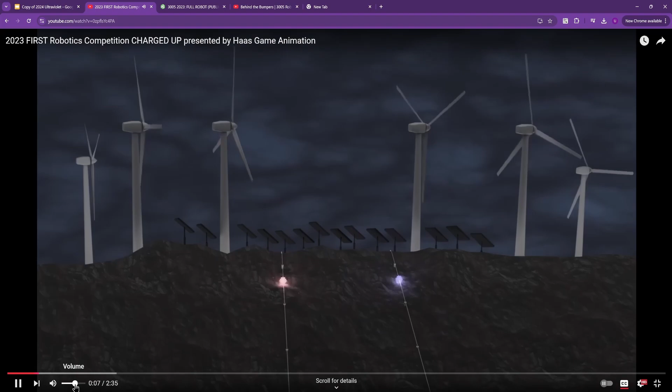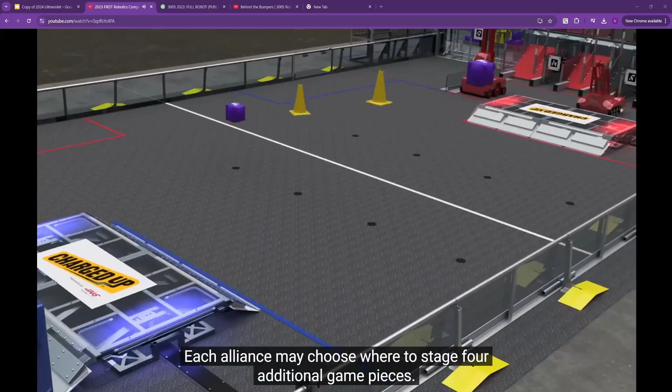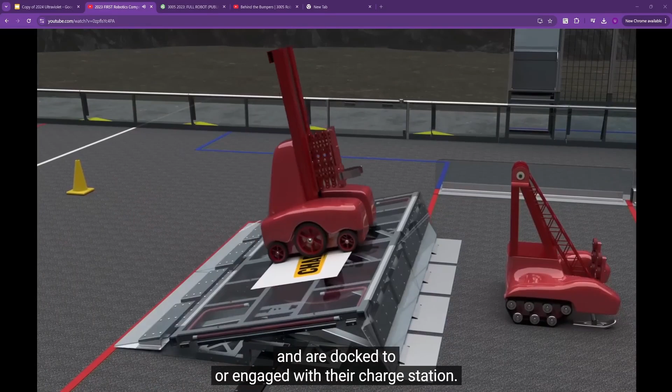Welcome to the 2023 First Robotics Competition game, Charged Up, presented by Haas. Two alliances of 3 teams each compete to score cubes and cones into their grid to charge up their community. The alliances earn additional points if their robots are docked to or engaged with their charge station. Robots start each match in their community and may be preloaded with either 1 cube or 1 cone. Each alliance may choose where to stage 4 additional game pieces. During the first 15 seconds of the match, robots are autonomous. Without guidance from their drivers, robots score preloaded game pieces, collect and score additional game pieces, and are docked to or engaged with their charge station. Charge station points earned during auto count towards a potential activation bonus.

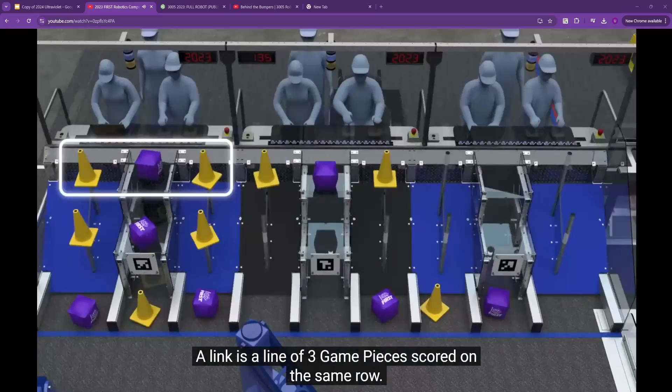The grid has nodes specific to cones and cubes, and some where either a cone or cube can be scored. During the remaining 2 minutes and 15 seconds, drivers control their robots. Robots continue to collect cubes and cones from human players at their substations to deliver power to the grids in their community. Each community contains 3 grids. The center grid is the cooperation grid. A link is a line of 3 game pieces scored on the same row. Completing enough links earns the alliance a sustainability bonus.

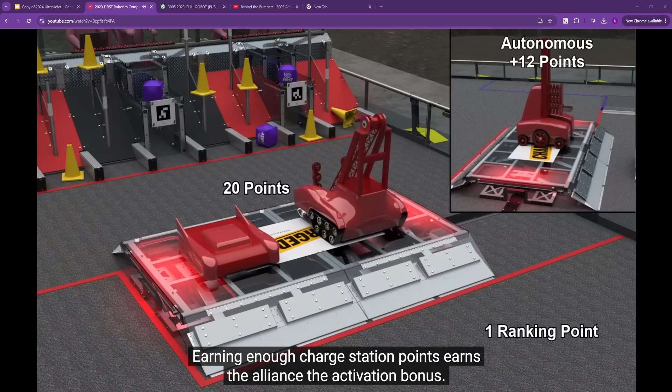If each alliance scores at least 3 game pieces in the cooperation grid, the sustainability bonus threshold is lowered for both alliances. Robots are protected within their community and loading zones. As time runs out, robots race to their charge stations. Alliances earn points for each robot docked to or engaged with the charge station. Earning enough charge station points earns the alliance the activation bonus. The alliance that earns the most points wins the match.

All right. Okay, so looking at our 2023 game, it's definitely very different from Crescendo. This is what we call a pick and place game, as opposed to a launching game.

In these games, your basic objective is to grab an object from one part of the field. In this case, we have our loading zone over here for the Red Alliance, and then we have to take the object over into what they called the community this year, into our protected zone, and then score them in different places along this grid.

In almost every FRC game, we have what are called cycles, where we're basically doing some form of repetitive task as fast as possible. In other sports, you might call it a possession, but since we have multiple game objects, we don't have turnovers in the same way. If you play basketball or watch any of those other sports, they're similar to those things. But it's basically when we're going to go get a new game object, take it down the field, and then score it, and then we're going to repeat that action.

Part of our goal in basically every game that we're doing is how can we perform those actions as fast as possible. That is one of the things that drove 3005, the robot that we're going to look at tonight, to design their robot in the way they did, was how they analyzed the game and the way that they wanted to play it to try to be as fast as they could at scoring those game objects. So what are the kind of tasks that we have to be able to do?

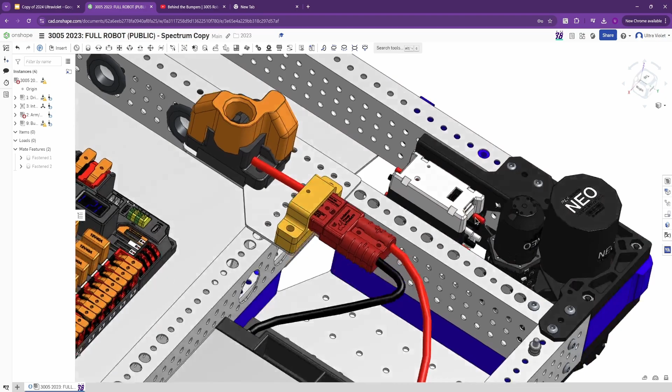Cool. So relatively simple swerve drive base, very similar to what most teams are running. The motors we use are called Krakens. They have integrated motor controllers into them. The Neos and Neo 550s that this team uses do not, so these little boxes here are what control the motors that they're using.

So this is a pretty standard chassis using the Rev swerve modules. They have a much smaller footprint, so they take up a lot less space than some of the other full-size modules, like the Swerve Drive Specialties MK4Is that we use on our past robots, also the West Coast Products Swerve X and Swerve X2 modules that were just released. And ThriftyBot has come out with Thrifty Swerve 2.0 modules as well, that are all in a pretty similar space to the modules we currently use.

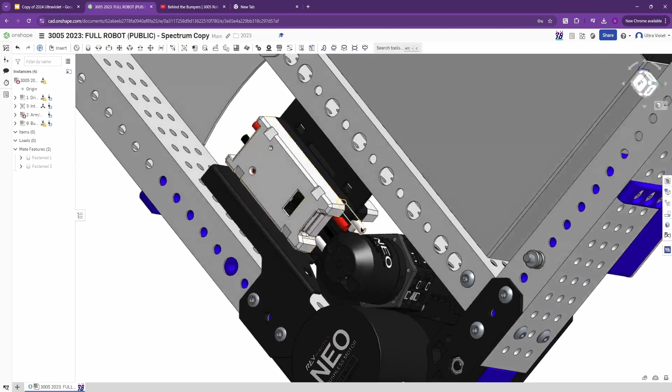So they take up a couple more holes here and are kind of like this full triangle of this corner, where here we're able to package it a lot smaller and then only have the controllers kind of sitting off to the side, where you could move these if you needed to. If you needed the space for something, since these are only attached with wires, you could have them mounted somewhere else, even run the wires all the way out if you had to.

So they do have some advantages, especially on space. They have smaller wheels, so they run a 3-inch wheel, which at different points had some different types of wheels. Some of them were having issues where the rubber would come off. They've fixed that for this season, the wheels for these modules work a lot better. You can still do that, but you have somewhat fewer options of the types of wheels you can run. And then they're only 1 inch wide instead of 1.5 or now even 2 inch wide on some of the bigger modules.

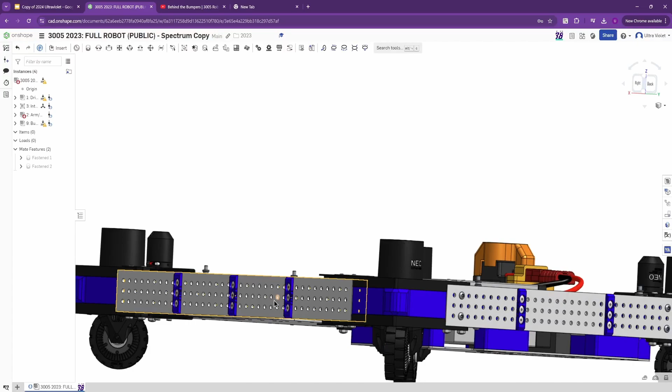But the frames are pretty much standard. They run these 2x1 tubes with this 1/2 inch hole pattern, so every hole on here is a 1/2 inch apart from the next. This really just gives us a lot of mounting options to move things. If we design something early and we end up needing to add some functionality or some part to the robot, having all the holes there already done normally makes that very, very quick to add.

One of the things they have here, they have these little blue parts, and these corners jut out as well. These are what we commonly refer to as legalizers. The way the bumper rules work, your frame has to be a certain distance away from your bumpers. The wooden part we talked about is kind of like the robot pads, and so these allow you to meet those rules explicitly. These are likely just 3D printed parts that they riveted on. Similar here, this is like a 3D printed cover, able to protect some parts of the swerve modules.

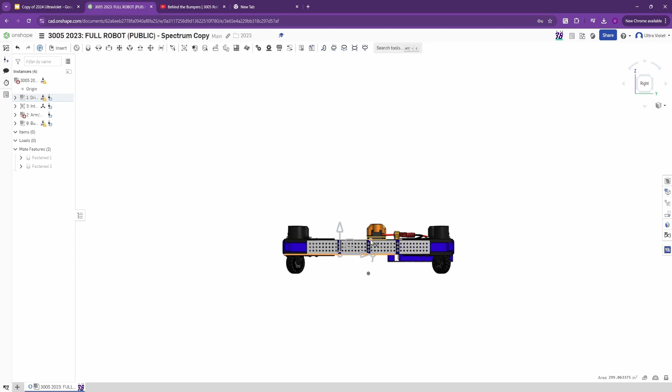And then they have a pretty standard rest of the system. They have a belly pan. They actually dropped a portion of the belly pan, but not all of it. So if we look in from the side, this upper part is just normal, attached right to the 2x1 bottoms, and they actually dropped down the belly pan portion that holds their battery. That's so they could get their battery kind of below the level of this frame, while still giving them enough clearance to drive up the ramp during the end game, or during the game, anytime they needed to drive up and over the ramp.

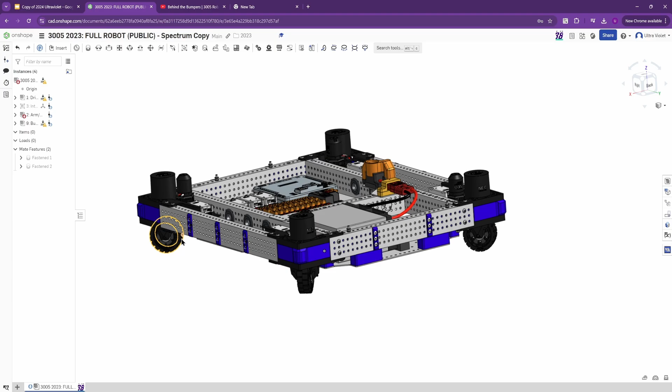We can pull bumpers back on. Maybe we can pull bumpers back on. What do we need to do? I did hide all instances, and now everything's hidden. There we go, bumpers are back. Okay, so we can see how the bumpers work here. I don't know if we have all of their mounts on here. Oh, that's the whole rest of the arm. Okay, it just showed everything. That's fine, here we go.

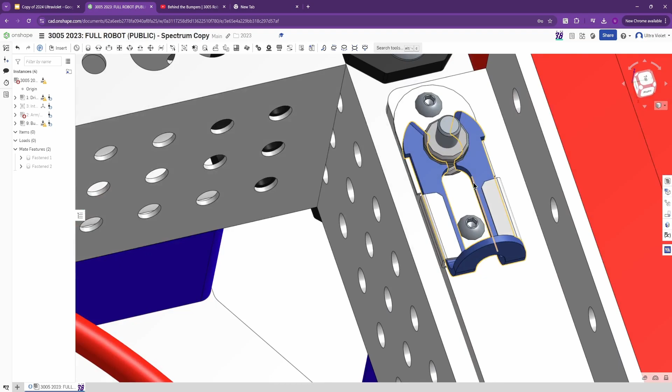Okay, so it also has their bumper latches. This is a relatively common bumper mounting solution. We've used this before in the past, I think back in '16, maybe we started this, '17 - almost certainly '17. Our '17 robot and I believe '18 both use similar latches. Sometimes they work well, depending on how we want to do it. But these basically just allow you to slide this back on each one of these 4 latches that go over these pegs mounted into the robot, and they just kind of snap into place, and they hold your bumpers on.

So depending on exactly how much space or size you have to fit everything, and again bumpers - we know the whole rule set is getting overhauled quite a bit going into next year.

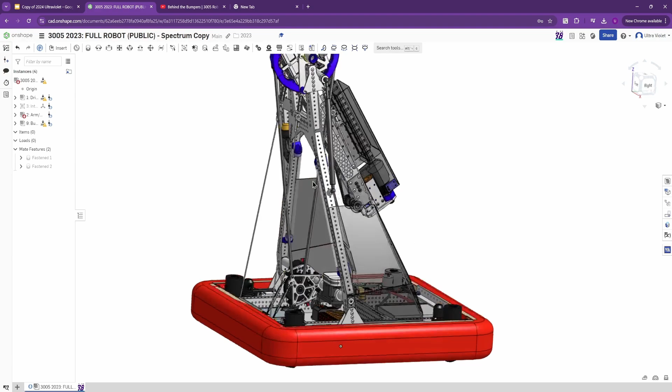This is a really integrated robot where there's not too many mechanisms going on. You basically have your drivetrain, then coming up you're going to have the rotation part of the arm, the extension part of the arm which we'll look at, and then the intake which has a couple interesting features on it as well. So looking at the arm, this robot doesn't have a ton of structure at the top - they did a lot of work to keep it very light. They didn't have any large A-framing or anything, they basically have these two main arm supports coming up here at an angle.

And then what they use is kind of like a suspension bridge - they're using tension members, so they have these that they're able to tighten on each side. I don't remember if they were using steel cable or cord here, but either works. These ones are probably steel cable, it looks like - that would be my guess. You can use relatively thin steel braided cable, it has very fine strands in it that allows it to be somewhat flexible and allows it to be very strong under tension.

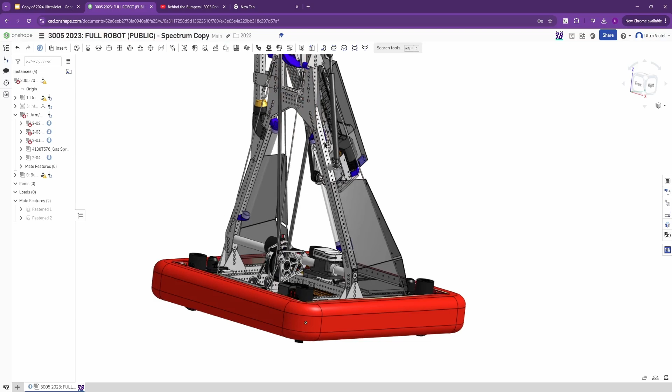So basically you're stretching this cable out, and if you do it on all four corners and stretch it out, they act against the forces the same way that having a bunch of actual support arms would. So if you actually wanted to come in and have a full A-frame tube, if you wanted to put more metal here like aluminum rods or aluminum tube going to the front or back, you could do a very similar thing, but it would just weigh more.

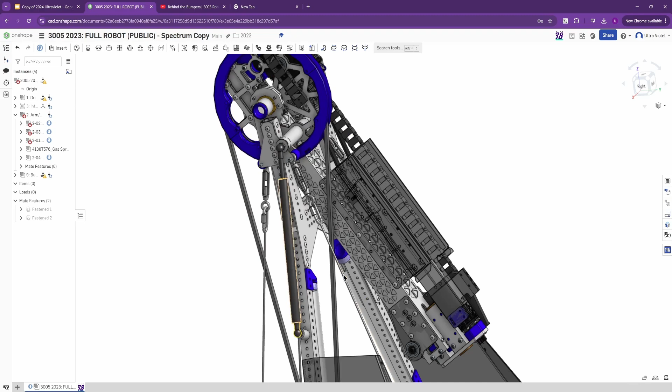With these tension setups, you can adjust how tight they are by turning these turnbuckles - similar to what we use to tension our chain, just a little bigger and designed specifically to run with cable. If you have all four of them done, and some force was trying to push back on this arm and wanted it to move backwards, you would be pulling these. Since they're already tensioned and tight, they're not going to expand easily, they're not going to stretch - they're not like rubber or anything. So since they can't stretch, you can't have this thing get pushed back. The same thing happens if you have some force here pushing forward - you can't stretch these ones as well. And the same works for left and right.

So for a relatively limited and very lightweight structure, you can still have an incredibly strong overall mechanism because you have these cable runs in place supporting the entire structure. They have some specific places where they do these standoffs and bolts on top of them, so they have those all designed into the mechanism - they know which side of everything goes where, how it's not going to have too much angle, or how big the washers need to be to support it so it's not moving around too much.

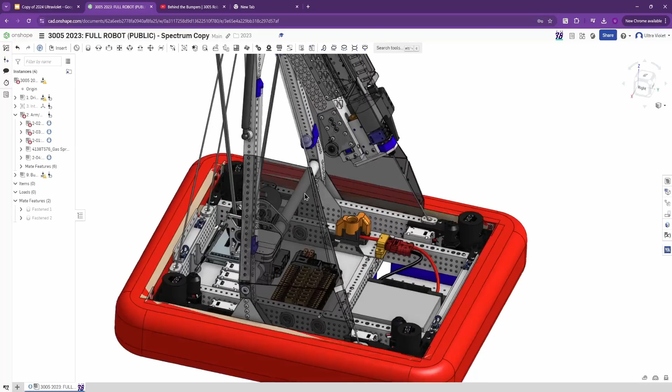So they did a very good job designing this in and making it work for them, even being able to use the cable to mount things like some protection here, sponsor panels most likely, without needing to have the full rail or anything there for it. So this is a very, very light system. If you have something that's going to be very tall, or just need it to be very thin and out of the way, this works really well for that.

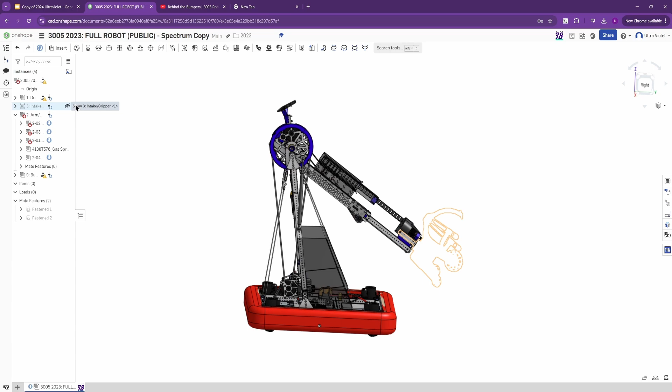Okay, so the main actual arm joint that does the rotation - what this robot's going to do is pick up its arm and rotate it forward and backwards. So it can start over here, put its intake out, grab a game piece from the floor, and then it's able to flip its arm all the way over and score from this backside position, or the extended backside position to reach even further.

I was looking for the button. I don't know where the button is. Okay, it's fine. Let's try to get it back in a reasonable position.

So this arm pivot joint is powered down here on the gearbox. They have two Neo motors on this gearbox, with just a single gear reduction, so the two gears come right off the motor. When we have the gear right on the end of the motor, or sometimes a pulley, we always call this the pinion, the one directly on the motor.

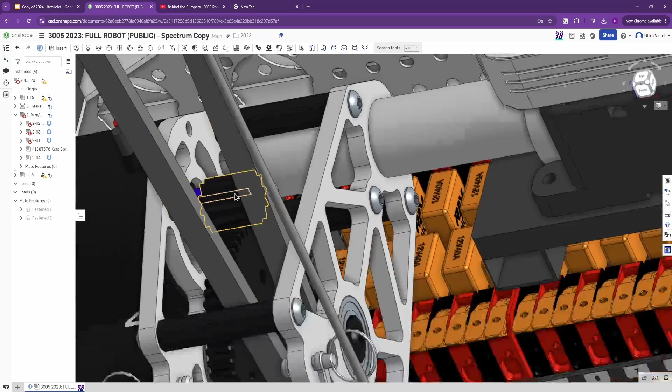This is often a small gear because, like we talked about last week, one of the main principles for doing pretty much any motion in robotics is that the motors are often spinning way too fast to be usable. So we want our actual output to be geared down. We have a small gear, pulley, or sprocket here, and then a larger one here, so that for every one rotation of this gear, it only spins a quarter of the time, or whatever the actual ratio is.

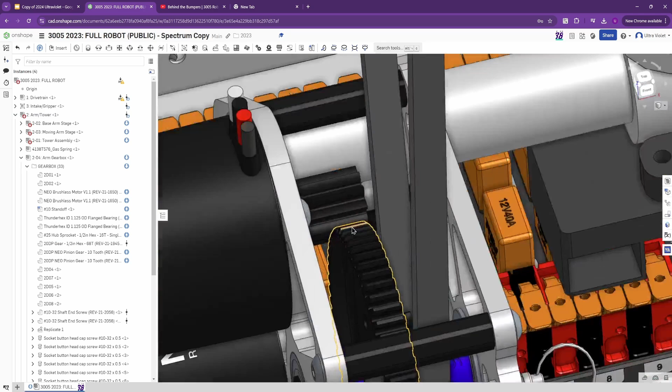In this case, we could go in and figure it out. We know this is a 10-tooth pinion, and this is a 68-tooth gear. The math is really easy, it's just division: 68 over 10. So for every 6.8 times the motor spins, this gear only spins once. That also means the torque output, the rotational force we have, is multiplied by 6.8 at this shaft. And so then they're able to gear it more.

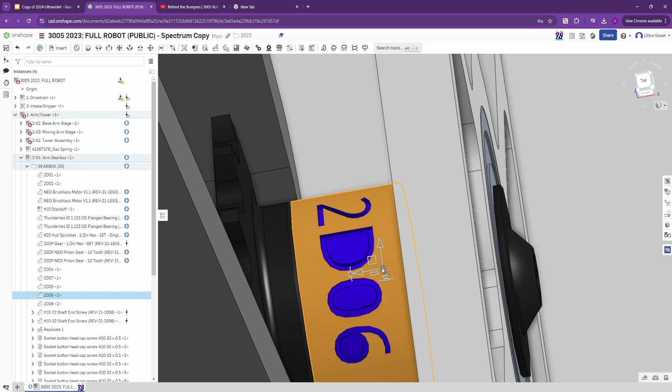So down here we have a sprocket, and the other spacers here also have the part number printed into the spacer so they know which one it is, which is nice. So instead, if you have two things that are very close together, they have it just embossed directly on the print.

You should have the same thing on this one, I imagine. Yeah, just down on the other side. So they have the part numbers directly printed into the spacers, which is a very nice quality of life feature. If you quickly have to reassemble something in the pit before a match, you know which spacer goes where, and you never have to figure out exactly which size it is or pull out calipers to measure them. You can have it printed directly into it.

Okay, so the other part of this gearbox - we'll come back to how this works down here. The sprocket here is a small sprocket. The gray blocks up here are chain, and they come up into this much larger sprocket they have at the top. So this is a very, very big reduction.

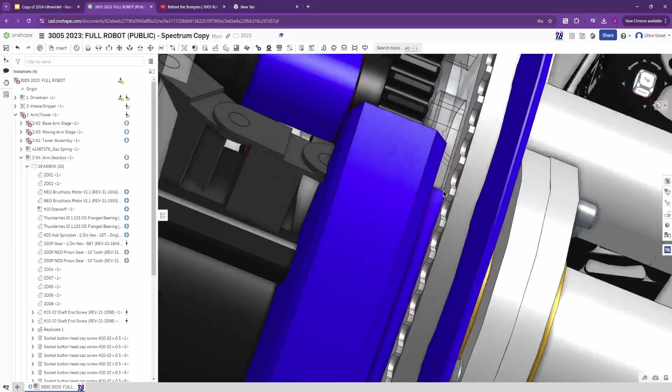So we can kind of see a little bit what it is. It's one of their custom parts, so it's just numbered by their numbering system. I don't know exactly how big this is, but you can imagine this is a much larger reduction because it's basically just the ratio of diameter from that large one to this small one, because they never actually need this arm to spin a full revolution - it can only ever go from here back to behind itself. So they want all the torque they can get to make it much more controllable.

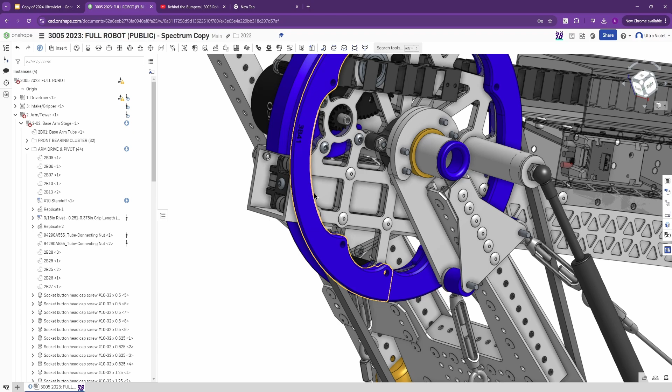And that's a big part of one of the important things we're trying to do while designing robots: mechanically, you want to build the robot in a way that the software and electrical team can actually control it comfortably and put it into positions easily. If this sprocket was a lot smaller, if you had less motor power or less gearing, it's possible the arm could still move back and forth, it might still be capable of doing it, but it would happen in a way that would be much harder for the software team to control.

A lot of times when we're doing the math to decide exactly how we want a ratio to be, part of that is thinking: how fast do we need this arm to be able to spin from the floor back to behind us, and doing it in a way that's efficient for energy, so we're not using too much battery, and is controllable in software, so that when we tell it to do something, it actually goes there, stops, and works perfectly.

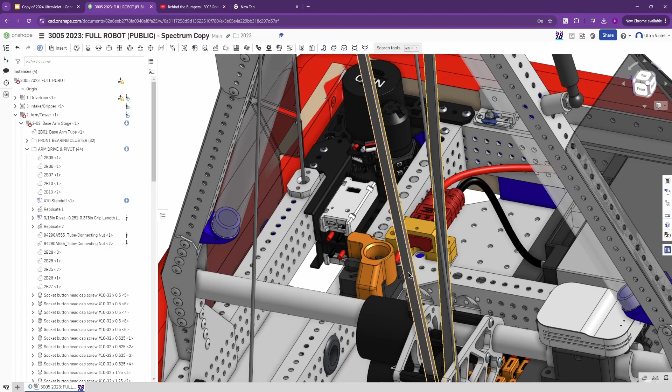Because they have this really long run of chain, even though it is steel, it stretches, so you need to have some form of tensioner on it, or as soon as you build it and start running it, it'll stretch enough that it's possible for it to jump off the sprocket, and we don't want that.

The way they tension this gearbox is because the gearbox is actually only mounted on this single pivot tube, and then it's tied back to the rear frame rail with these two turnbuckles. These two devices are the same type of device. One of these threads is left-handed, one is right-handed, so when you turn this, it either tightens both of them or loosens both of them. That way you can pull this gearbox down, it'll pivot around this pole and get lower, adding more tension to the chain.

So if during competition you start seeing that this chain is loose, all you have to do is turn these two turnbuckles, and now you can get a much tighter chain.

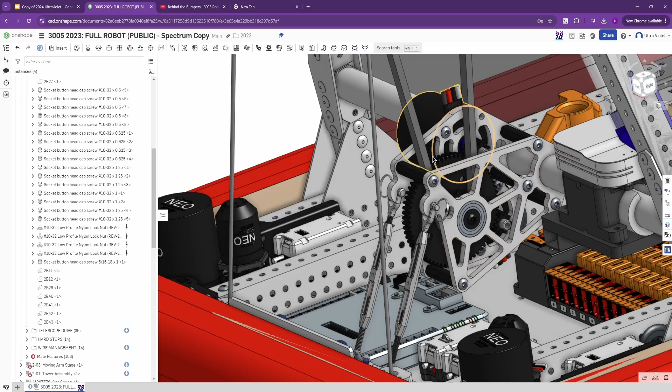This ends up packaging very well. The gearbox ends up almost just floating - you don't have to have a bunch of other sturdy mounts for it, since you have this part in tension and you're using the chain tension itself to hold it. It's not like this is going to flop around at all, and you're able to have a rather strong tube here connecting across the whole assembly.

The way they mount this is with this little part here, which is called a tube insert nut.

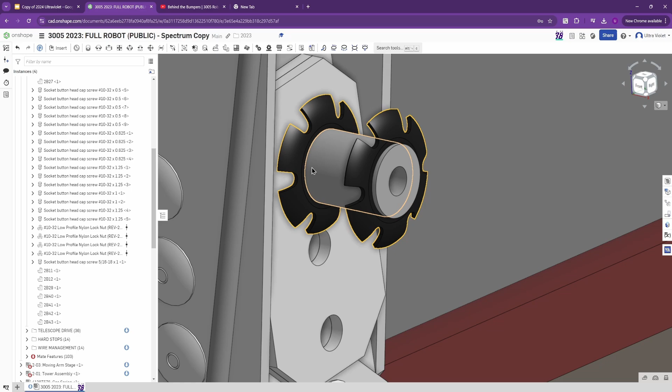These are used in a variety of situations. Some of the larger ones end up being used on parts of bicycles to hold the handlebar and things, part of the stacks of different bikes. Sometimes they'll get used for table legs and things. But basically, they have these steel little flanges, the black part here, that are able to be pressed and compressed into a tube as you shove it in one way. Then if you try to pull it back out, these little corners try to dig into the tube and stop you from pulling it back out easily.

This bolt here is what's bolted into that tube insert nut. You can also put those into the ends of some square tubes. They make different ones, but they're more commonly used for round tube, and we've used those a good amount in the past, and they do work pretty well.

In addition, they actually mount their radio to the same tube, the radio and radio power module here, so they have a little 3D printed adapter that lets them just clamp this on, and then I imagine this is some amount of foam to kind of shock absorb it, so they're not getting as much vibration through their radio either, because you don't want the radio to restart in the middle of the match because you shook it too hard.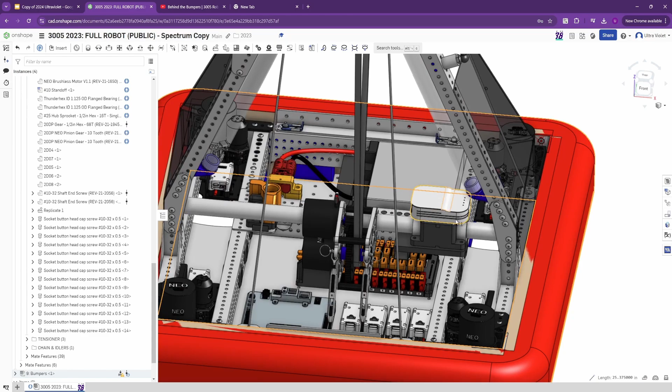This is up out of the way - it's not too close to any motors. You have the motors here, but they're not that close to it. You can easily see the lights, easily grab it to program it at the event, anything like that. And we'll be running the new radios next year, so they won't look exactly like this, but they're a similar rectangle brick, just black now.

Okay, so going back up, we can start looking at how they did the pivot as well. So this is a pretty nice way to do it.

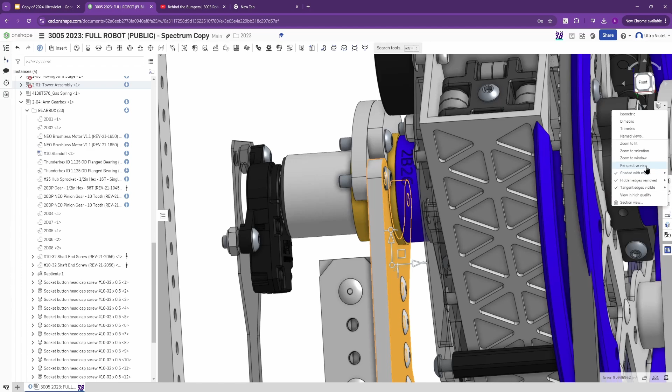So they have these plates that are riveted into the 2x1, and they are capturing this bushing. What's cool about it is instead of just putting a hole in a single plate, let me grab a section view here. Yeah, perfect. Okay, so instead of putting a hole in a single plate, both of these could have been just one single plate and they could have shoved the bushing through, and that would have been really strong. It would have worked great.

You would have had no issues until you wanted to change the arm. If you wanted to change the arm, you'd basically have to somehow either take the whole thing apart or hammer this tube through the entirety of the arm assembly to be able to get it all apart. And that's really frustrating. You don't have enough time.

If you're in the middle of playoff matches and you're trying to get the robot back up because something broke, you want to be able to do this really fast. And so these bolts right here give you the ability to do that, because if you just unbolt these lower two bolts, this whole upper cap comes off, and now the whole arm, bushing, and everything can be taken right out the top of the robot once you remove the chain.

You'd probably have to unbolt a couple other pieces that are mounted on. You have to deal with the wiring and things, but it still allows for a lot more maintenance than it would if you had to somehow shove this tube through and then reinsert it.

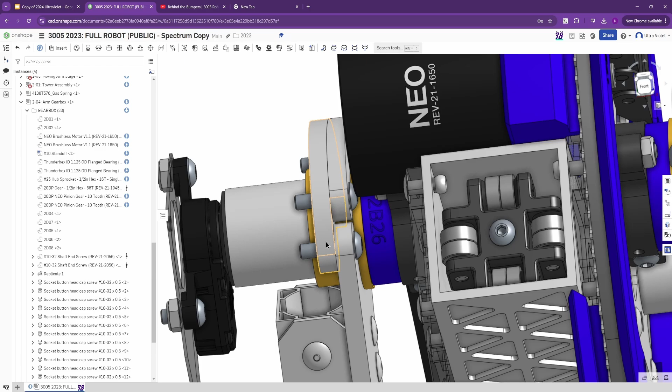Without a noticeable loss of strength that actually matters. You're still not going to be ripping through these bolts at all through any of the weight, especially since most of the weight of the arm is still going down, right? Gravity's always acting on it that way. We're not too worried about the top unless it's coming out for some very, very bad reason.

If it's getting yanked on, this robot's not having to climb from this. We're not suspending the entire robot from this. Even if you were, this would still probably be enough. You might want to add another set of bolts or something, but you'd probably be able to get away with just this.

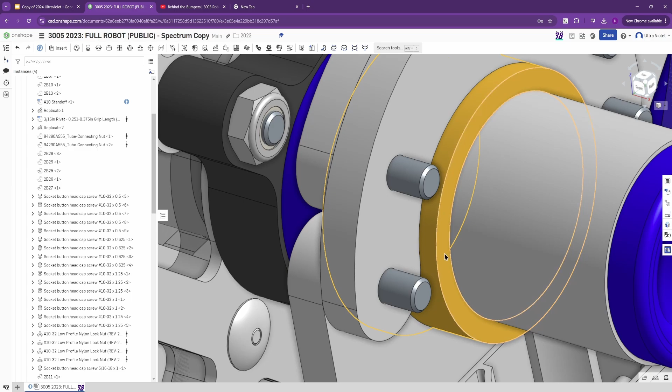Okay, so this is that pivot shaft that's being captured there. We briefly talked about bushings last time, but just a reminder, these are also known as plain bearings. They're made of like a brass, and they normally have some sort of oil embedded inside of them, so as it rotates, it gets lubricated so it can slip. Largely, these are just much more inexpensive than ball bearings, and they're also way more space efficient.

A ball bearing for this same size tube to be able to spin inside of would be much, much larger than this bushing here, would be much heavier, and just isn't needed in an application where we have enough torque to overcome any of this friction, so it's able to move smoothly anyway, and we're just not spinning very fast, where we're not going to be generating a ton of heat in this motion either, or at least continuously not very fast.

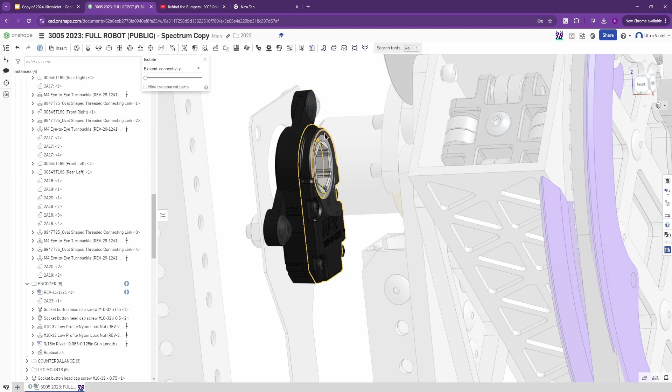Okay. The other part of this pivot that might be interesting is this little bracket sticking out over here. What that is their absolute encoder mount. This is a REV through bore encoder. This little device lets us, or lets any team, very quickly know where a shaft is that's positioned inside of here and where it's rotated.

And it can do it in absolute units, which means when it powers on, it knows which way it's pointing. So even if you start the arm completely vertical or completely down or in any position, the robot can know where the arm is at boot, at startup, and then from there be able to send it to wherever you're actually telling it to go. So this is a very convenient way to do that.

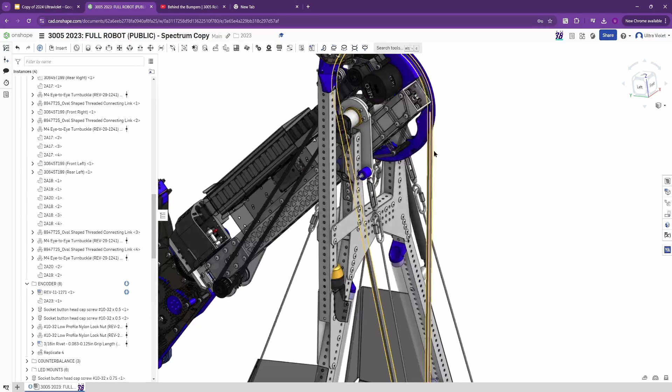We did something similar on our pivot this year, so we could start it up in any position and the robot would know where it was. And you also just get more accurate feedback control for the programmers because they can know the exact angle of the arm without having to go through any of the gear reductions and things that the motor is.

So if you're using the internal encoder of the motor, you would be spinning dozens of rotations for every time this needed to move a little bit, where here we know we're spinning only that portion of the rotation that we're worried about and actually directly controlling.

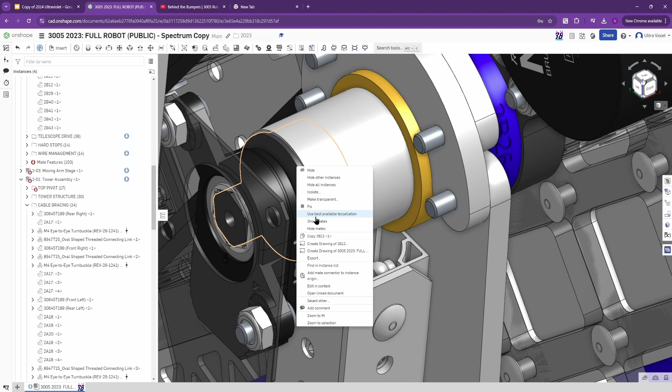So they have a little tiny bit of hex shaft mounted here, using one of the hex tube adapters that they pressed in, and then a little hex shaft. That actually might just be a full part they made. Yeah, this is actually a full printed part, and they just printed the hex shaft on there.

So instead of having a piece of hex shaft, they just printed this entire thing, and they embossed the part number again. So any of their prints, they can do that. They always leave it there so they know what part number a print is. Then this just goes inside the encoder, so you don't need the aluminum shaft there. It's not taking any real load, all of that's being transferred through this. You wouldn't want it on the encoder, so this is a bit lighter to just have it as a printed part, and that works great.

Similarly, they have some more parts that look like lightly, probably printed parts, almost certainly. They have these chain guards on the outside so the chain can't skip off at all, and those get bolted to the big custom sprocket that they made. So this spacing and everything is there so they can have their different mounting points on it, and anything else they need.

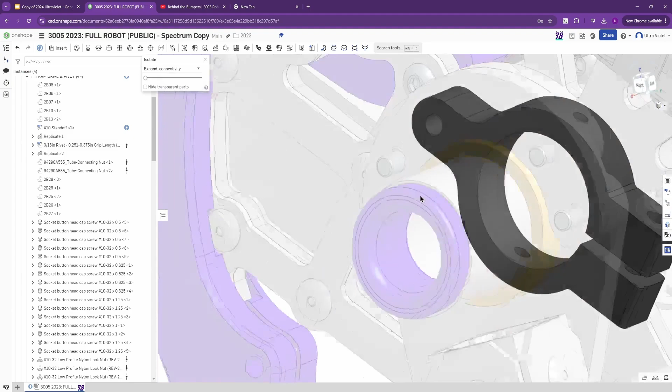Should be able... I'm trying to figure out. Yeah, so this is part of how they're able to mount to the actual arm. So this printed part here mounts to the sprocket, and then this clamps along this tube.

I'm not sure if they get it any other place. So it looks like you have the sprocket part here. The opposite side from where the sprocket part is, is just a piece of polycarb. We can see it's translucent in CAD, so we know this is not going to be metal. This is probably smoked polycarb, which is like a translucent gray color, and it looks like it just goes through that at the 1.125.

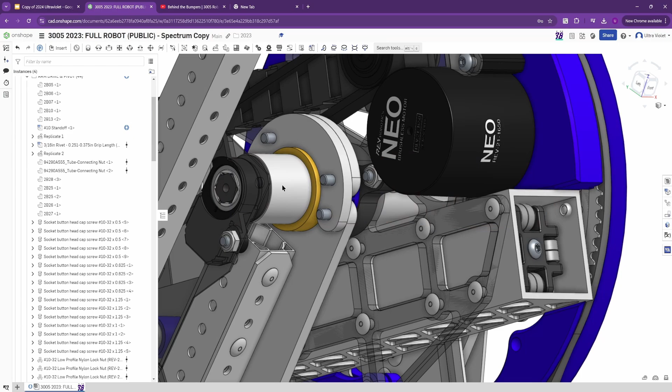That's probably similar, yeah, so that's still going to be a relatively nice fit there. And then they just clamp on again. I don't know if there's anything else transferring any torque there - it doesn't look like it. But it would be relatively hard for that to slip, but not impossible, but probably not.

I don't know if they may have at one point pinned the tube through here so you could drill through one of these holes and put a bolt through there if you needed to. That may have been an option they were considering but didn't need to do. The clamping was enough when they bolted down this bolt here - that gap gets smaller and clamps to the tube, allowing it to rotate cleanly with the whole arm assembly.

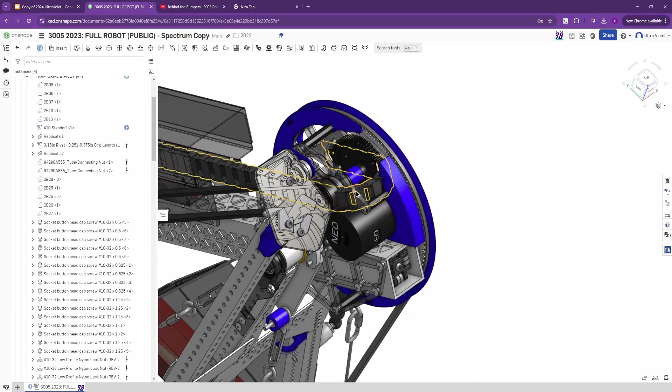Okay, so let's look at how they do the extension. Kind of built into this sprocket, we can see we start seeing the different bits of bearings and some bolt holes and things, because they actually use it as the gearbox mount for the extension. Let me see if I can make this a little easier to see - I'm going to hide the cable chain. Okay.

So we have, again, a relatively simple single-stage gearbox. We have the pinion on the output of the motor, and we have the larger gear here, so we get that nice gear reduction again. We can look through - so this is a 64. I'm guessing this is a 10 again. No, this is a 13, so it's a little bit different gearing there.

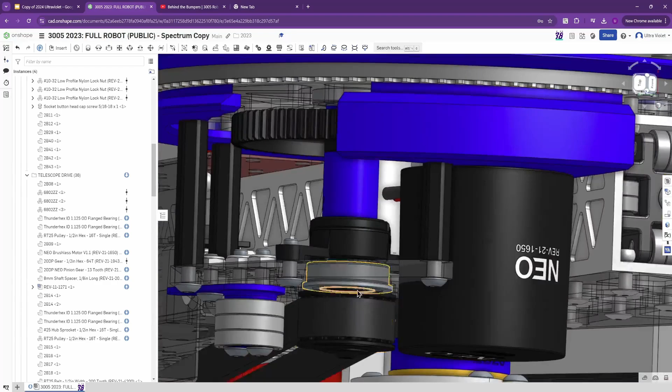So not entirely sure why they decided to go that route instead of getting something even smaller. There may be a packaging issue, some reason why they needed it to be a little bit further away - possibly because of this belt, actually. This is probably why - my guess is if you mounted a 10-tooth there with this same gear, the motor would have scooted in just enough to hit here, and you wouldn't want that. That's only from looking at the CAD, no real idea if that's the exact reason why, but that's probably why.

But you still get enough reduction there for this linear mechanism, because you have this pulley that's on the output here, and it's driving this really long belt. And it's driving this belt down to a sprocket, and so the sprocket itself is what's doing our linear motion.

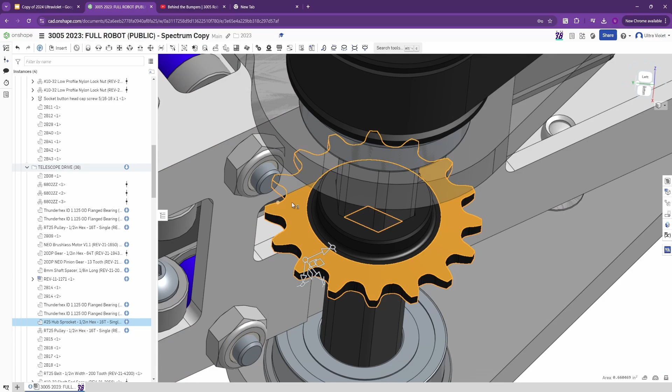I'm going to hide some things again - let me hide the drivetrain and the bumpers. Do that quickly.

Bumpers. Okay, so we can see under it.

So you have another sprocket, and they've turned this bit of chain here that's mounted to this tube into a rack. This is basically like a linear gear, so instead of the chain wrapping around the sprocket, it's just moving along the individual teeth of the chain mounted here. It's doing that to extend and retract this whole assembly in here, fully extending it and bringing it back just by spinning this sprocket in the chain teeth down here.

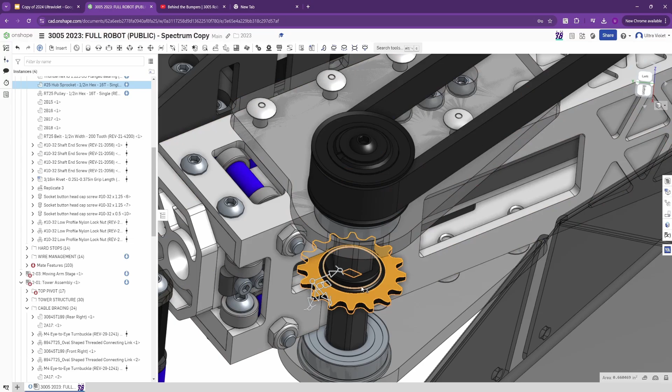So every one rotation of this sprocket moves it basically the circumference of the sprocket, roughly. It's only a few inches for every rotation, and it needs to move a pretty good amount. I don't know the exact amount of extension this has, but it's a decent amount here, 20-something inches, probably. Let's see, 20.5.

So with that, you have enough control from the motor and gearing to need 4 or 5 revolutions total of that sprocket to extend it the whole way. That should be controllable enough, and was, since this was a competitive robot.

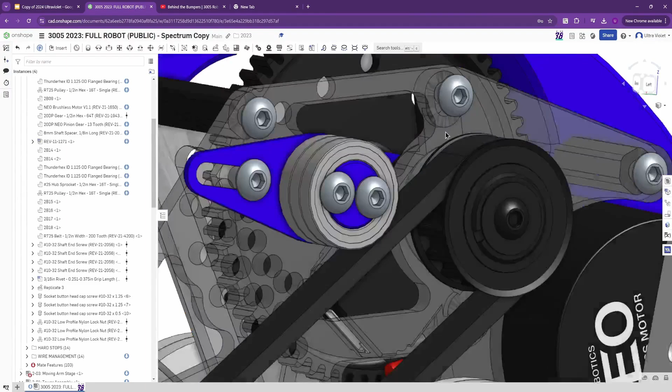Okay, a couple other little things they did. Because they have this really long belt run - most of the time with belts, we don't have to worry about them in tension too much for our small belt runs like intakes and things. The belts we use have fibers running through them that don't stretch easily, so the belts don't grow the same way the chain does. You'd think the steel would be harder to stretch, but because of the way they're assembled and the way the whole assembly works, the chain actually creeps and stretches a little bit more than the belts will, since they have these fiber cords running through them that prevent that stretching.

But when you have a really long run, it's much harder to account for that, as even little things like if this plate started bending a little bit, or you just didn't get everything exactly right with the rivets and holes and stack up and things, you can have a little bit of gap in things over a long distance.

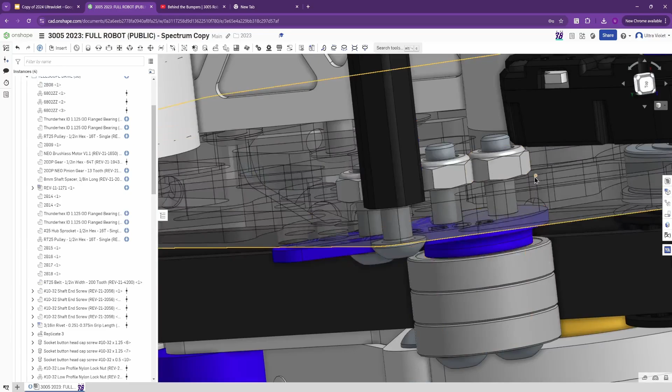So they did build in a chain tensioner here that allows them to loosen up a few bolts, slide this tensioner in, and then tighten these back up, because they have a single slot in the part here, and then a longer slot, if I can find it.

Are those also holes? Oh yeah, okay, so those are also holes. This is what you get for doing this live. Again, I haven't actually looked through this robot most of the time, so a lot of times I have to figure it out along with everybody else. There they go, the slot is down here at that curve - I just couldn't see it earlier.

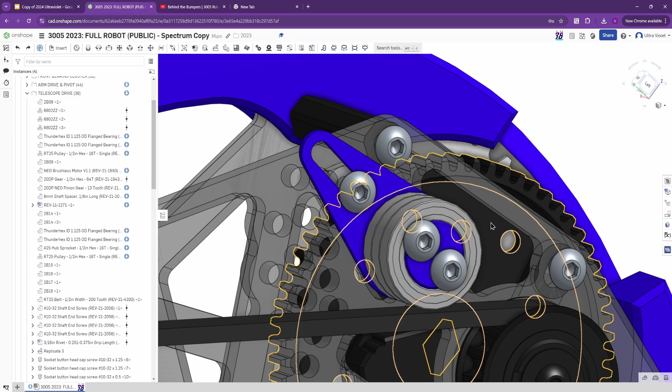So you have this slot right here, and what they're able to do with that is move this bolt into any of these other holes to adjust the tension on this setup. This is one of the looser ones - they could take this out, loosen these two, rotate this down, and start pushing it in further, pushing the belt down to add more tension. So if anything starts to creep throughout the season, they have a bunch of different settings built in for where to put tension.

These are all on this arc that you can kind of see forming here, so this gives them a lot of different options. They would know what the next hole over was to adjust something and add a little bit of tension from this pattern they built in.

So a lot of those are things we're talking about again - it's relatively easy to make a robot that does a task. It's very, very complicated to make a robot that does the task extremely well and also works throughout an entire season, can be repaired, can be upgraded. All of those things go into our engineering design process to make a more competitive robot.

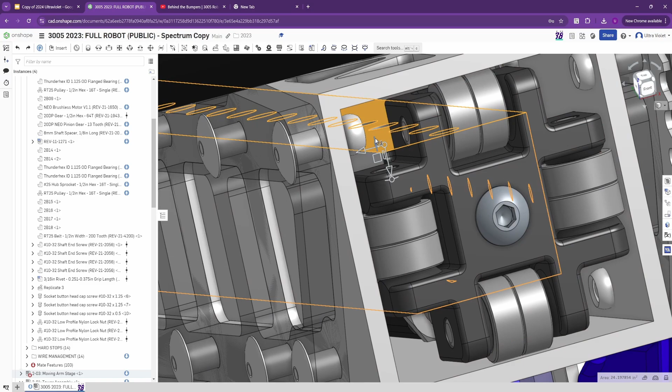Okay, so we're going to quickly go through how the extension works, because it's kind of the same bearing package that we've seen in elevators and things. They just have roller bearings on the bottom stage of this tube that are sliding on all of the inside walls, and again, the bearings reduce friction, making it slide super easily.

And then at the top, out on this side, so extend this out, we can see that they have bearings on the sides here on each side of the tube. They again have bearings, and they're able to gap them so the chain can come through nicely.

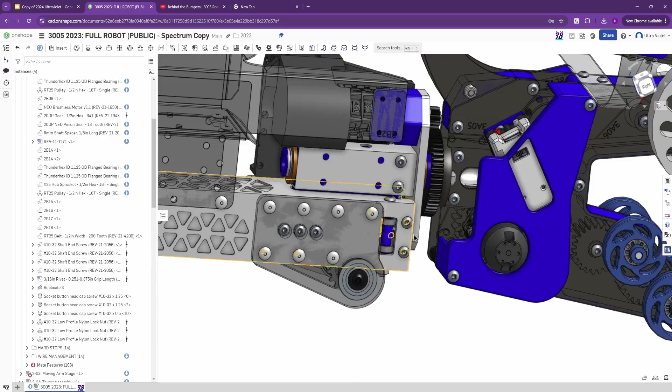Similarly, they have some other parts that have to come through up at the top, and so they use that same kind of gap method. You have a slot here in the external tube for it, so it's able to slot in. So when they're going down to actually intake, this whole arm is very supported. It's brought back in fully, and it is not going to bend or break when it's out as an intake in the middle of the field. But once they extend it when they need to score, it's a little bit weaker there, but you shouldn't be running into things at that point.

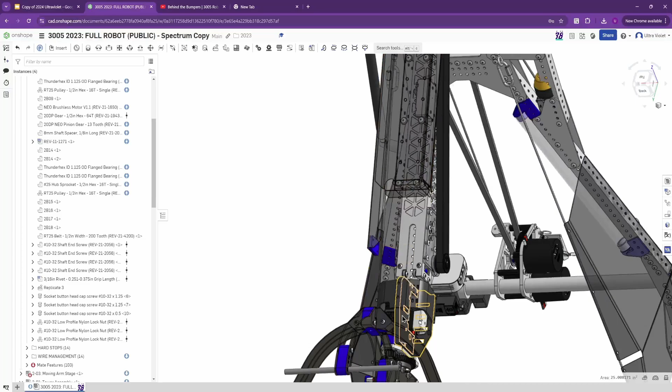All right, let's look at a couple things. So the last bit of the extension that we hadn't talked about is how they do the cable management for the extension. They have a cable chain that's mounted to the arm, a plastic cable, and then it's able to get folded back up inside this tube. So as it comes back, it gets folded up and held in here, so it's not swinging around. And that's where the wires are, able to extend out to the motors that they keep out on the end of the arm.

All right, with the last little bit of time we have, we're going to talk about their intake specifically. So their intake was one of the cooler ones this season, because what they figured out they could do is when they came out and extended the arm and put it down at the floor, they were able to use these two wheels to intake both cones and cubes depending on which side was facing down.

And in this configuration right now, this is their cone pickup configuration. So they would pick up tipped over cones. The cone would be on its side, and they would basically almost pick it up like a log. They wouldn't worry about which side the flange was on, because they have this pivot joint here, or a rotating wrist, that allows them to spin this whole contraption upside down.

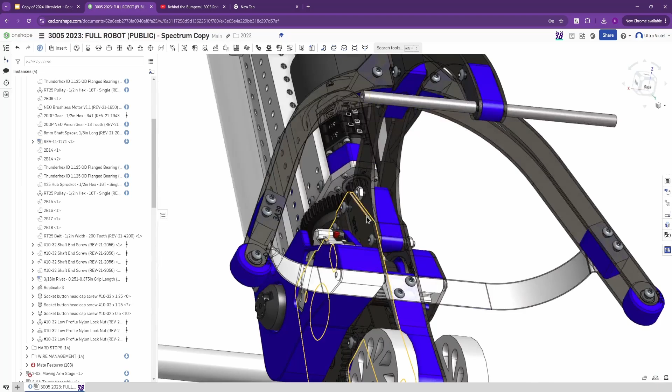I don't know if it does it in CAD. It doesn't look like it does. It would be free spinning right now, or at least it doesn't do it in this configuration in CAD. But this allows them to spin this over 180 degrees.

So that they can pick up the cone, and if the flange is over on this side, they can flip it 90 degrees and have it be able to score and put the cone facing the bottom, or if the flange is over on this side, they can turn the other way and do the same thing. So no matter which way the cone is, they're always able to place it on the little stick that you have to score it on, because they were able to rotate their wrist.

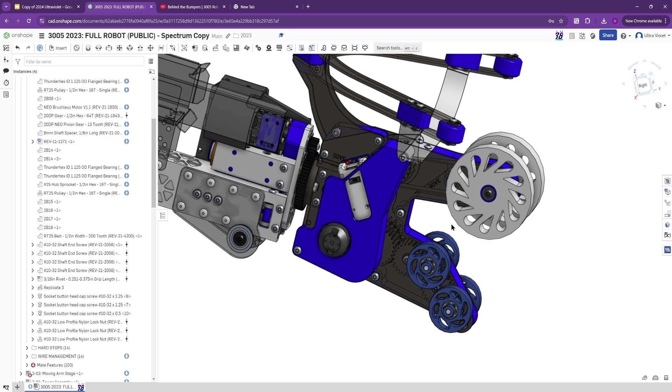And that was one of the more challenging design choices that a lot of teams had to decide, was whether we wanted to be able to manipulate a cone in that way, because it wasn't a symmetric game object. It's not like a ball where you can just score it in any configuration because it's all the same. The cone itself clearly had a very one-sided way it had to be scored, a single orientation that worked. And their robot did that very, very well, able to pick up a cone smoothly from the ground and then place it back depending on which way they flipped the wrist around.

And then when they flipped this all the way over and put this part towards the ground, the cubes were able to be intaked into here, basically acting as a ball. They were cubes, but they were inflatable. So once you did that, they pretty much worked the same as any foam ball or anything, and it had a very lightweight outer frame here.

These wheels have cutouts in them. They're called compliant wheels, because you can push or squeeze them and these little cutouts fold and bend, so they mold to the shape of the game object.

So that's what we're looking at, being able to intake the cone through here, sort of just grabbing a cone the same way you'd grab it with your hand. They're just doing it with rollers here, and similarly doing the same thing with a cube.

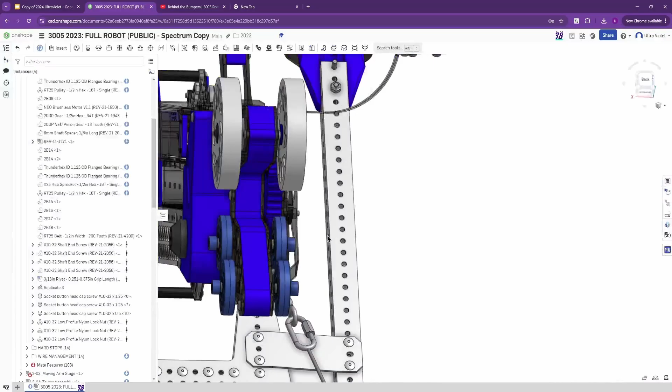The motor packaging to be able to do this rotating wrist and also drive the intake is pretty cool. It uses a good amount of 3D printed parts out on the end here, but we can start looking at the one in here first. Let me hide this mount.

So this is relatively simple. This is a Neo 550, a really small brushless motor that Rev sells, into an ultra planetary. This is a tiny gearbox that's often used in FTC robots, but it mates well to the Neo 550. And then they have a small printed adapter here to mount the shaft off a little bit.

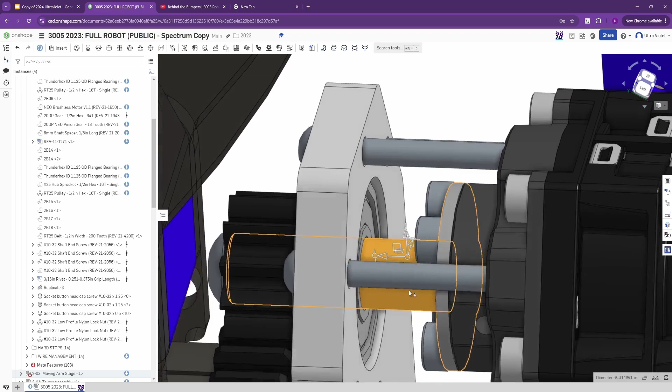So this is an adapter that's sold that lets you go from the ultraplanetary to an 8mm round shaft, which is the same shaft size that the full-size Neos use and some other motors use. They're able to put the pinion gear right here at the end, and that spacer block lets them hold this housing in here without having it rub anywhere and without the shaft getting too long to run into things. They had some extra space here at the back end, so it was easy enough to do that.

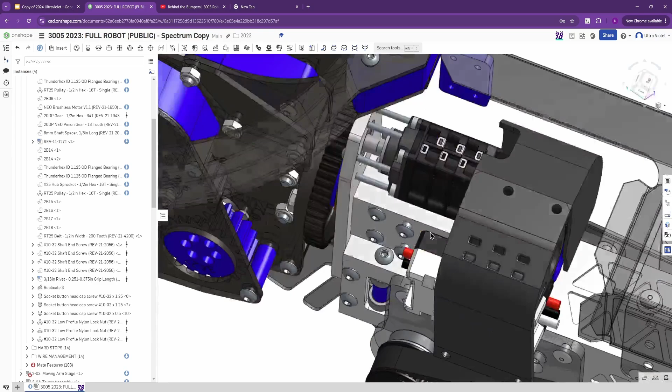In addition, they have this part here, like a printed cover, to stop anything from hitting this. The Neo 550 itself, this outer shell does rotate. So this part up here where the face is fully mounted, but this is part of the motor and this will spin. So you don't want wires or anything touching this, or even people's hands. It is spinning very fast sometimes.

So guarding it is pretty good. They have some zip tie holes here, probably for wires, so you can run a zip tie through this channel. All these details are in their 3D printed parts. They cost basically nothing but a little bit of print time, and it allows your robot to be more functional. If we design things early and do a lot of design work to make things better, we can iterate and design in features like that, especially with 3D printed parts, because it costs very little to add features like this, compared to if you were doing this out of a sheet of something and trying to cut it out, that would be really complicated. But it's something we can definitely do when printing, since we're just adding plastic and layers going up.

All right, so again we have this wrist joint here. We can actually look and see how the wrist itself works. Let's see if we can scoot this out a little bit. I think it's probably easier from this side.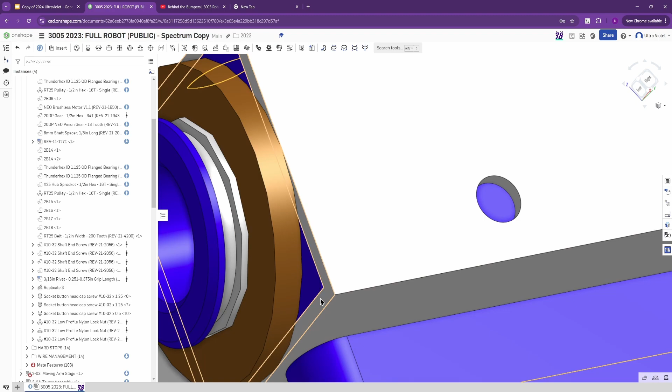So this is another printed part. This blue is almost always going to be printed on their robots. This was basically in there to be able to hold the bushing on the back end of this tube, and then they have an aluminum tube here as well. If we isolate this, yeah, it does look like they did all of that as one part.

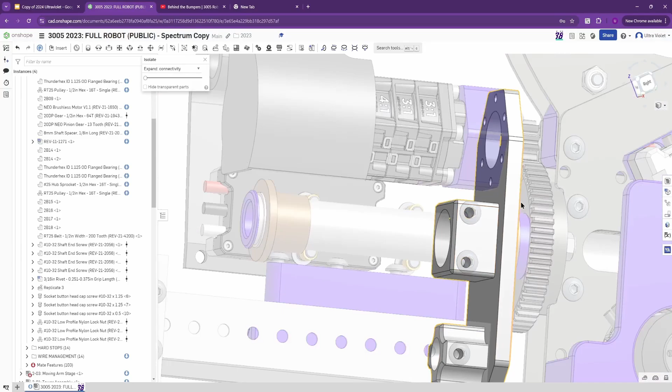Yeah, so that's probably one of the most complicated machined parts on this robot. This looks like they could have done it in different ways, but most likely this was done fully as a billet of aluminum. So this started as basically a big rectangle of aluminum, and then they most likely had a CNC mill come through and remove all of the parts of the aluminum they didn't need.

So they cut away all of this rough cut part, leaving this plate and these blocks, and then they came in and added the features afterwards to drill through, to add these drill holes all the way through, similar to the ones through here and through here. These ones are tapped, so those bolts could mount to it.

Then they turned it over, ordered it on a machine that could turn it over on its own. Depending on how expensive of a mill you have and what features it has, you could have a part that the mill itself can turn over. They machined in these interfaces as well, mostly for weight lightening, I imagine, and they could do it, so they did.

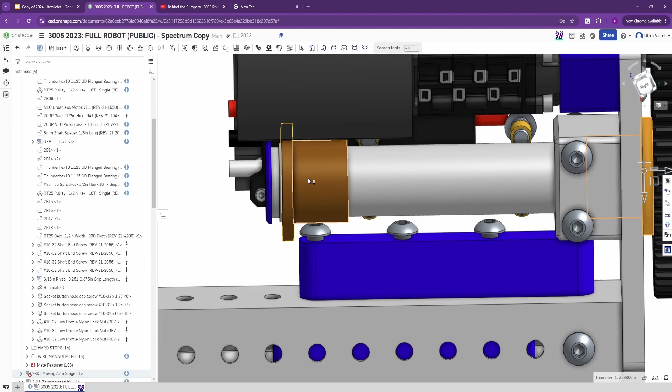Yeah, but again, you have the same sort of bushings here for relatively slow rotation, where you could have a bearing, it just isn't nearly as space efficient, and here they're very much worried about space to be able to fit everything into that joint.

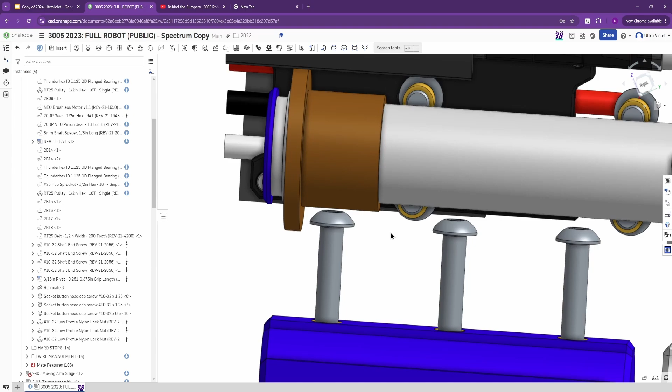Yeah, and you can see this is how they actually bolt this whole assembly through into here. I don't know if there's... Oh, there we go. So into this 3D printed part, they have threaded inserts. These are metal threads that you heat up and press into a 3D printed part. So that's how they're able to bolt that together. And it looks like those get bolted in somewhere in there. We can kind of see where. Oh yeah, they actually just get bolted in right there to the tube itself.

So that's interesting. What's the easiest way to see how that works? We can probably section view something, maybe here. Nope, that's too far away. Inner wall, let's go that one. Except backwards. Arrow. There we go. And slightly farther. There we go.

So because these have these holes up here, before they insert all of these tubes and things, they're able to put these bolts in and secure it into place, and then they can put the tubes back on top. So if these ever did loosen or they need to work on them, they would need to pull this shaft out to be able to get these bolts back in. They'd also probably need to take this gearbox off as well. So this is definitely a pretty space-constrained whole unit here that they're working on.

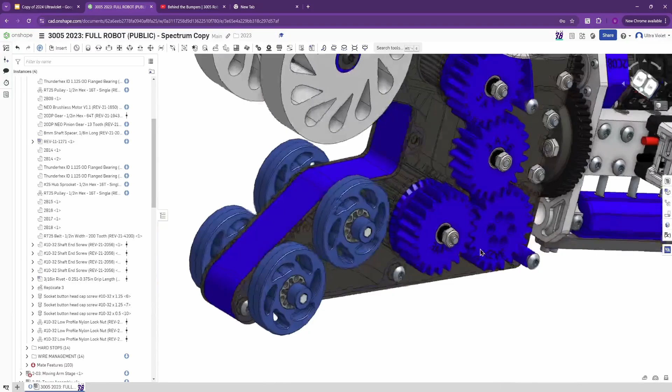And to wrap up, we're just going to look at the intake motor mount as well. So we can see inside of here and behind this plate, they have a gear that mounts directly to the ultraplanetary output that the Neo 550 is running. And so this gear specifically...

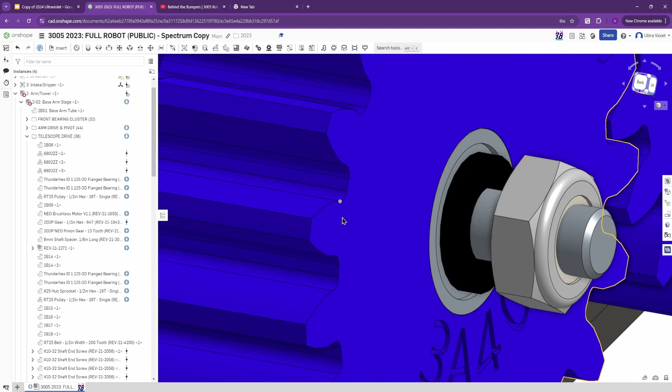Does a couple things. So it drives this custom gear that they have here. And so they have a couple little spots and plates for it and things to be able to have bearings everywhere. Most of the bearings are riding, these are basically a dead axle, so the shaft itself is basically this entire gear. It's spinning on these bearings that are sitting on these bolts, so the bolts aren't moving at all. The inside of the bearing isn't moving, the outside of the bearing is spinning quickly, and so because of that, we don't want it to be a bushing, we want it to be a bearing.

And then they have the rest of the gear chain here actually connecting all of these gears together to power all of these rollers. And then a similar thing up top. You have two gears here, and then a belt driving out to the front here to power these rollers that do the main intaking for the cubes.

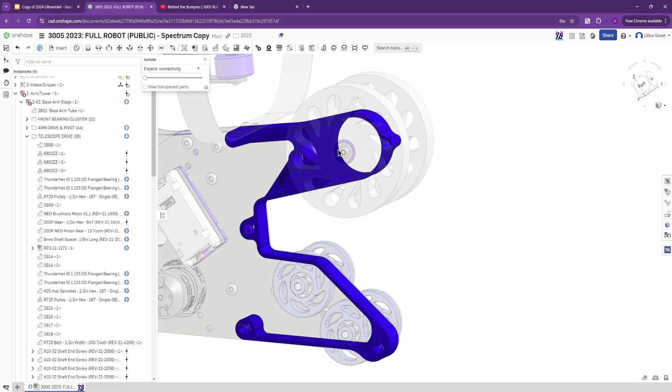Again, they use some pretty clever 3D printed parts here. This part is a guard for the whole thing that they're able to print as one piece. They added some standoffs into here, were able to put a hex shaft in here as a standoff. Same thing they did in a lot of these places. They use hex shaft standoffs, and this whole print goes around all of that.

So if you did need to take something off, you would need to take this side off of the whole unit to be able to get it to the inside, because you wouldn't be able to just take a single standoff easily without removing this whole outer plate. But it does give it, it's very robust.

It gives you some mounting points for other parts like the cube arm assembly. They did some of that as two different parts, or parts that go on the inside, so they're able to iterate a little bit. They ended up wanting to change how the cube worked, and if they wanted to change the shape of this at all, they could do that without changing the whole rest of the cone intake down here.

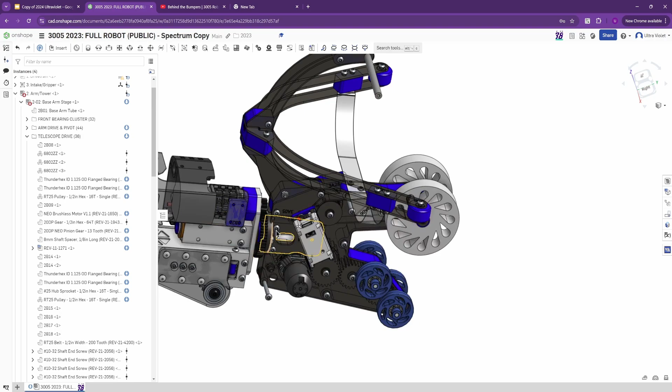So you're able to change throughout the season, iterate, make it better. There's a lot of design work that goes into having a robot that's functional and allows you to accomplish all of your tasks throughout the entire season, not just something that works once, but is fully buildable and maintainable all year long.

I think that pretty much finishes up the 3005 robot. They have some other basic things. This is probably the camera mount, some basic RSL mounts going on the inside here. These tubes were for LEDs, I believe, so they have LED strips running inside here so they can do feedback to their drive team. But yeah, overall, a very, very clean and simple robot.

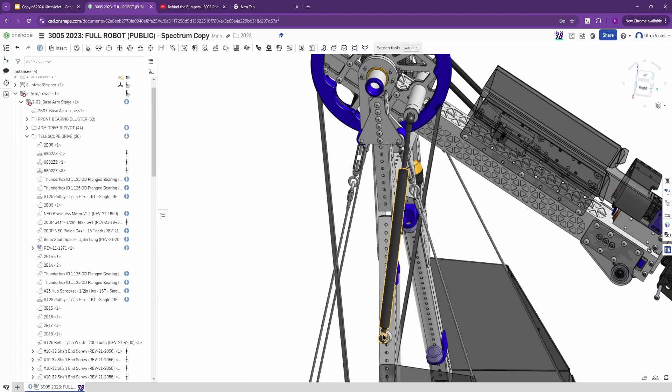Oh, the one part we forgot to talk about, I'm going to do really fast because I skipped it when we were doing arm stuff. This piece here is a gas spring, or sometimes called a gas strut. This is the same thing that's on the back of your SUV's hatchback to lift the liftgate up. These have compressed air on the inside, and they're always trying to extend this rod with some certain known amount of force.

In this case, they're using it to counterweight the arm. Even when there's no power on the arm and it's sitting out here fully flat, pushing down, trying to fall back to the ground because of gravity, the gas spring here is always pushing up on it. So if you do your calculations correct, you can make it to where the arm is nearly weightless for the robot. You don't really need to get it perfect, assisting at all is very helpful.

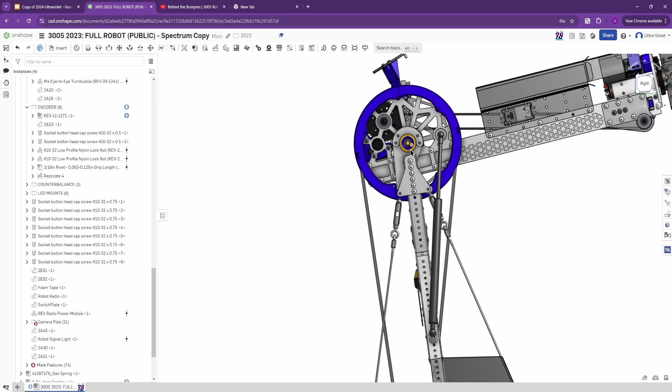Having the spring assist helps the robot hold it in place, so it uses a lot less energy when it needs to hold the arm at a certain position up in the air, because the gas spring is basically helping push it up at all times. The very clever part of the way 3005 did it is because the lower pivot of this gas spring and the main pivot of the arm share a direct line.

If I get back to the right side, okay. The way they mounted it, it's able to push up the entire way until max height. And because there's no extended pivot bar all the way through or anything, this doesn't run into anything. Even as it comes back down, it's still doing the same thing. This is what we call an over center mechanism, it crosses the pivot point. This linkage bar right here basically crosses our pivot point.

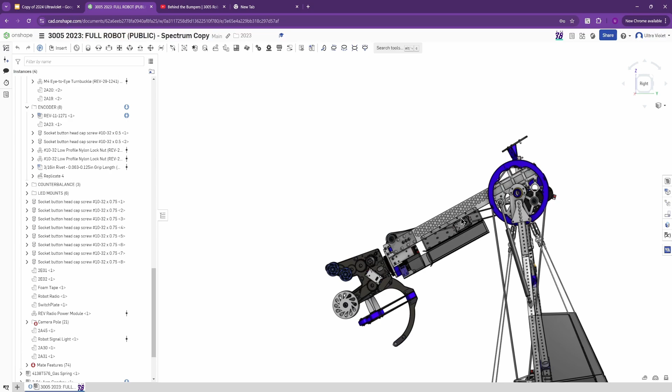As it's working down the other side, this is still always counterbalancing gravity, trying to push up the arm. No matter where the arm is, the gas spring is always trying to push it up. This makes it much easier to control, because it has that spring assist the whole time. It makes the robot think the arm's a lot lighter because the motor's not having to lift all of it all the time. The gas spring is doing a good amount of the work.

It would be a lot harder to lift your tailgate on an SUV if you had to lift the entire thing every time. If you ever take those gas springs off, don't do that on your actual car. But if you ever need to, if something breaks, if you're working on it, it gets a lot heavier if those aren't there.